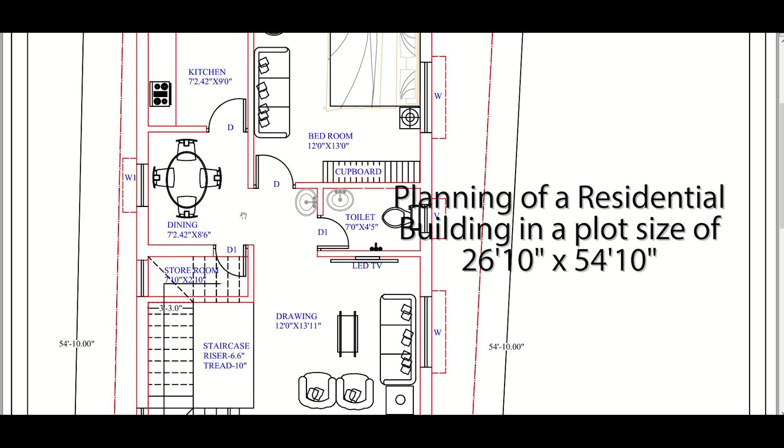In this video we'll discuss the planning of a residential building on a plot size of 26 feet 10 inch into 54 feet 10 inch. This residential plan is for one of our clients, Mr. Paramenjaya Sahu sir. We have made this plan according to his requirements.

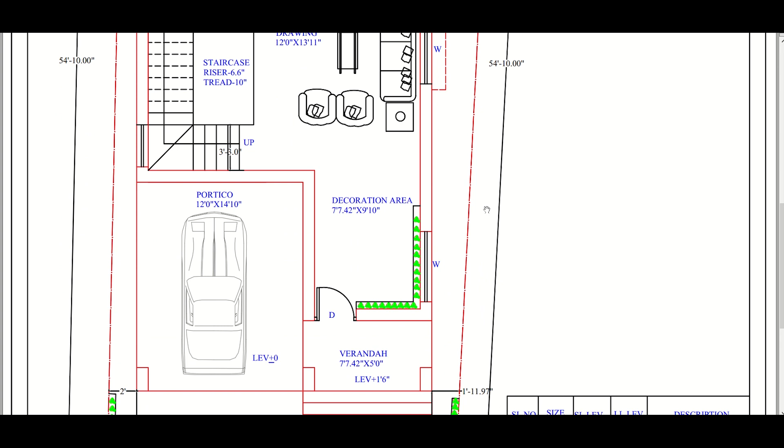The building type is G+1, that is ground floor and first floor. We have given proper setbacks in all directions. As you can see, the plot is not exactly rectangular, it is curved in this portion. If you don't know what setback is, you can watch our video on setbacks. Setback is basically the distance you leave for constructing your building from all sides.

The front setback is 4 feet, left for ventilation and looks. From the left side we have left 2 feet, and on this side also around 2 feet, which is 1 feet 11 and some inches. So around 2 feet setback is provided here, and the maximum setback is 4 feet 7 inches along our right side. The back setback is around 2 feet.

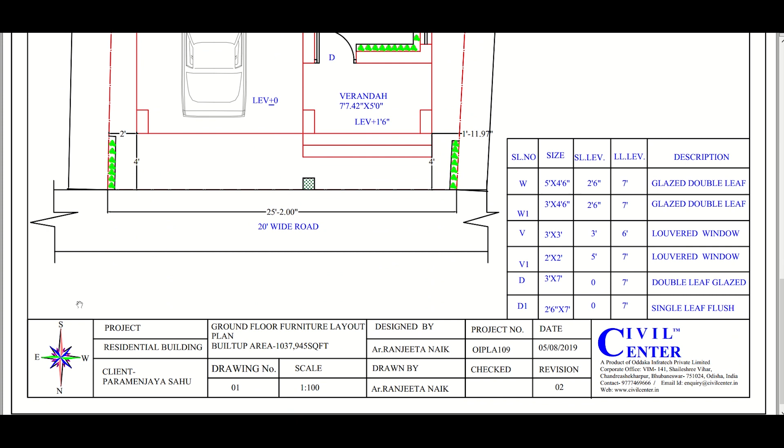These are the directions given: south, east and west. So it is basically a north facing plot, and the size of the road is 20 feet. The building has been constructed in an area of 21 feet 3.42 inches into approximately 48 feet.

This is the ground floor plan. Let us start with the portico. The requirement was that we have to keep one 4-wheeler and 2 to 3 2-wheelers.

One 4-wheeler can come easily in the size of 12 feet into 14 feet 10 inches. The maximum length of a 4-wheeler will be 13 feet and the width will be 7 to 8 feet, and in some cases 6.5 feet as well. So one 4-wheeler and 2 or 3 2-wheelers can easily be accommodated in this portico, meeting the requirement.

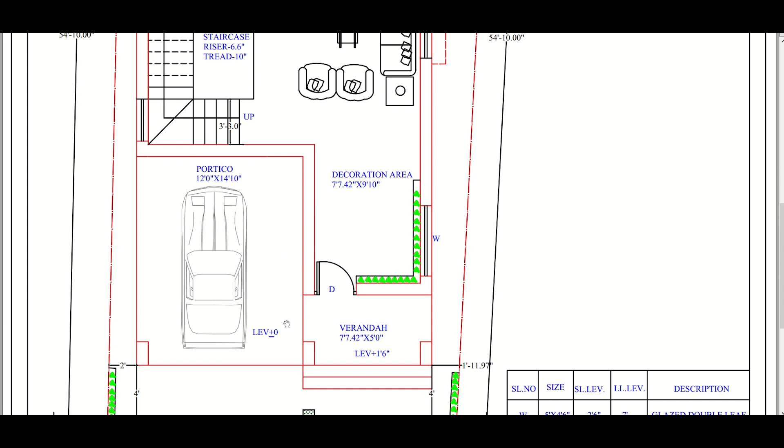We can go to the veranda directly from the portico or through this main door. This is our veranda, which can also be used for sitting. We have provided 4 feet at the front of the building for ventilation, which can be used for gardening purposes too, improving the aesthetics of the building. As you can see, we have provided proper setback on all sides and have not congested the building.

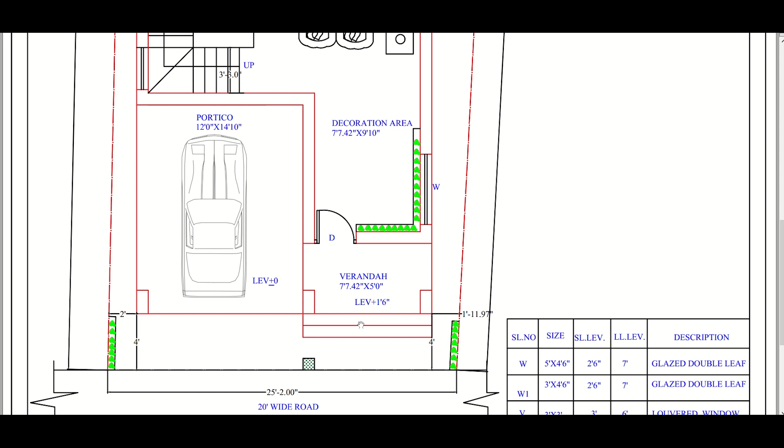The person will go from the veranda to the drawing hall. In front of the drawing hall we have made a decoration area and also given a sliding window for proper ventilation, so this portion will be well ventilated and light will come in properly.

After the decoration area we go to the drawing room, which is 12 feet into 13 feet 11 inches. The requirement of our client was that the staircase look should be aesthetically beautiful.

Here is the upward direction of the staircase; the person will climb from here to the first floor. The look of the staircase will be brilliant, and we will show the 3D view in further videos. It has a magnificent look, and below this staircase the space can also be used for dining purposes if required.

This staircase gives a picturesque look to our drawing room. Here is our TV, a sofa, and two more sofas. If we want, we can also give a partition here for privacy.

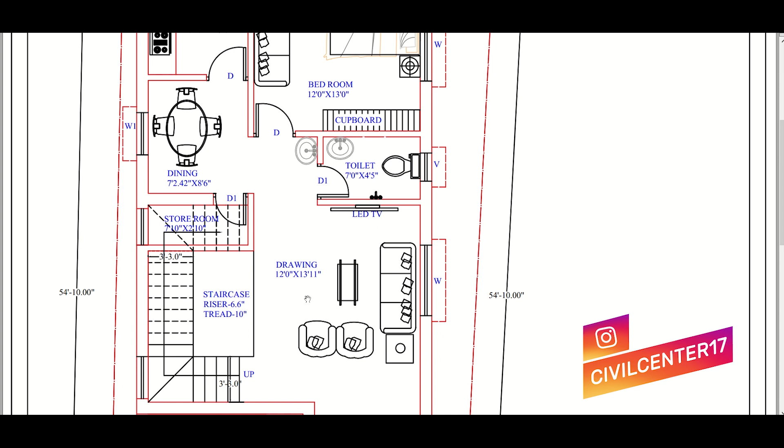Moving on, there is a toilet which can be used by anyone who comes to the drawing room, as it is a common toilet. We have a sink here and we have kept our commode, or water closet, at the wall so that the plumbing pipes can come directly, since we don't want plumbing pipes running through the 5-inch wall.

Our outer walls are 10-inch and inner walls are 5-inch, including plaster. So we have provided our WC, or water closet, here, with a tap and a sink.

We have also provided a storeroom under the staircase for storage purpose. Moving on, if we provide a partition here, in the dining hall we have placed it near the kitchen. So this is our kitchen and this is our dining hall, allowing easy communication between the two. And this is our bedroom.

Now bedroom is in the southwest direction and our kitchen is in the southeast direction. So the directions of these two rooms are the best position as per Vastu, which was our client's requirement - that one bedroom and one kitchen should be as per Vastu in the best position. So we have provided the best position for kitchen and bedroom as per Vastu.

The bedroom size is 12 feet into 13 feet, which is a good size for two persons living. We could accommodate a bed here and also a dressing table and a sofa. We also have a cupboard here, and these are the positions for side tables and night lamp also.

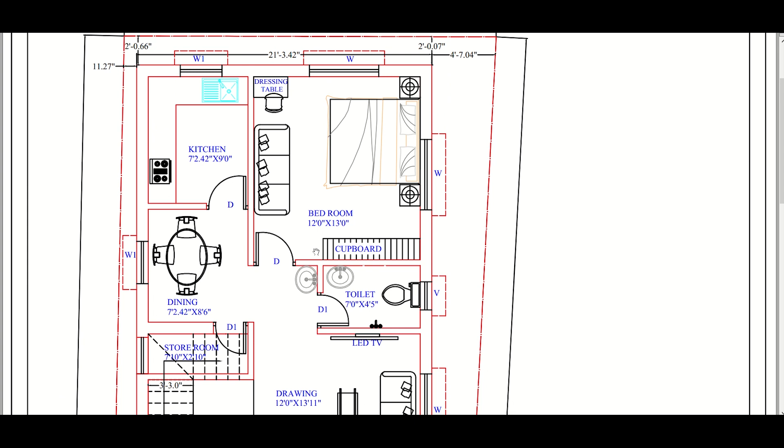So it is okay as per plumbing and also considering the client requirements. We have also considered the ventilation requirements here, that is we have provided sufficient number of windows and also made sure the sufficient sizes are provided so that client requirements are fulfilled. So friends, this was our plan of the ground floor.

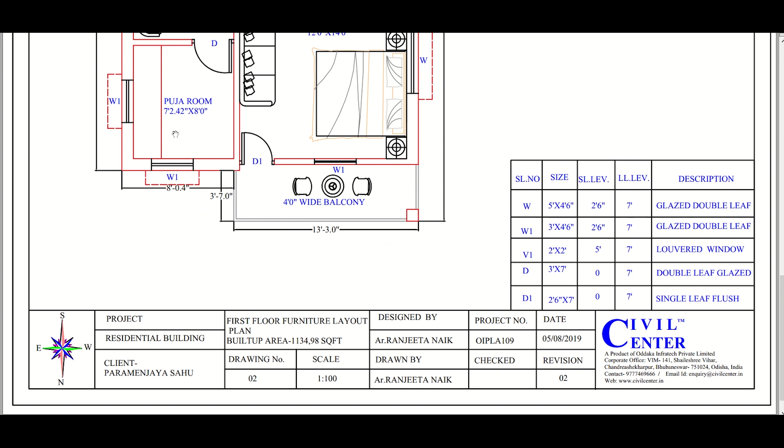Let us look at the first floor. So this is our first floor plan. In the first floor also, as you can see that as per the client requirements, the puja room is in the northeast direction. This is northeast. So at the northeast corner, we have the puja room and its size is a little bit larger as it was our client requirement.

You can see that we have provided two windows so that it is ventilated properly. We have also provided a sit out area here where persons can come and sit. So this is our staircase.

As we see that our riser was 6.6 inches and our tread was 10 inches. So this is our staircase. Person will come directly to our living room from the ground floor. So to the first floor, a person will come directly to the living room.

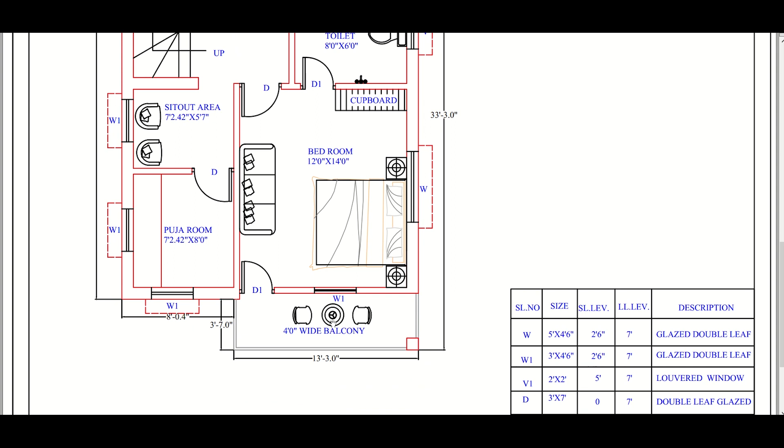So this is our living room and this is our bedroom. Now this bedroom has one attached toilet and also a balcony. So it is in a great position, and from the front it will give a good look as well to the exterior 3D view. And we also have proper ventilation facility here, and room size is quite decent, which is 12 feet into 14 feet, which is sufficient room size for two persons.

Now the toilet size is also good, which is 8 feet into 6 feet. As you know, the minimum width of toilet should be 4 feet. So this toilet will accommodate a lot of space.

Now moving on, we have provided another toilet here which is attached to this bedroom. Now this bedroom has also a balcony which is 3 feet and 9 inches wide, and the size of the bedroom is same as the bedroom of ground floor, that is 12 feet into 13 feet. Only the balcony is additional, which will also be good for recreational purpose. Some persons can put some chairs here and sit and enjoy the weather.

Now in the first floor, we find that we also have kitchen and dining in the same position as in the ground floor. But as you can see that in the ground floor we did not provide any door here. In the first floor we have provided a door here because we want some privacy. Now we have two bedrooms with two attached toilets at the first floor.

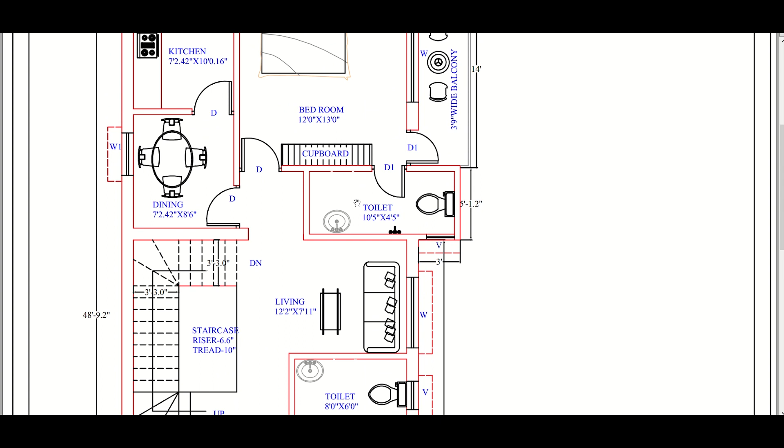In the first floor also we can observe that the plumbing pipes will be in two directions because of the toilet and the kitchen. This is the kitchen and this is the toilet. So the plumbing pipes will be along two directions.

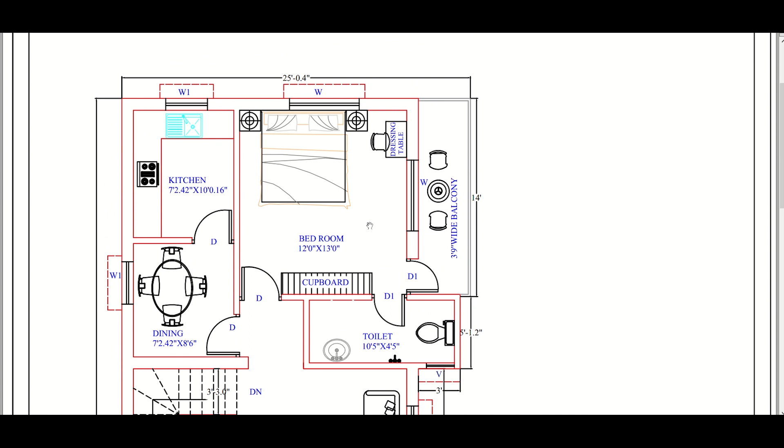So it is okay. Now, while planning this building, we had fully considered our client requirements and all the practical considerations, and also we had made sure that sufficient ventilation space was given. And another thing, we had given some importance to symmetry - that is, we had considered our ground floor plan and overlapped them before making our first floor plan. So these are the things which I had considered before making this plan.